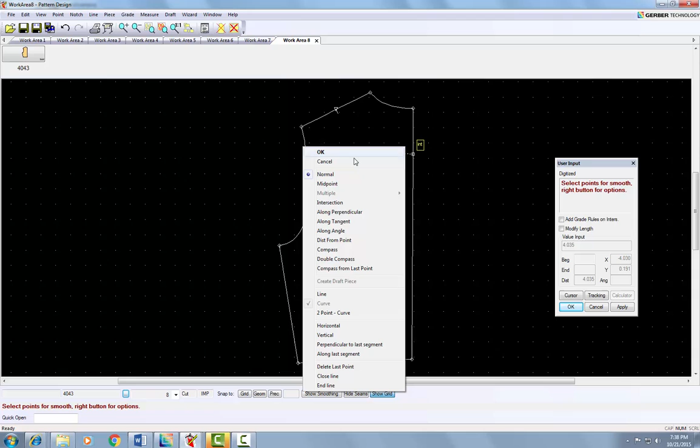First point, I'm going to click here, right click, change to value mode. Now you can see the yellow arrow occurred going down, so that will be 3 inches down. I'll type in 3 and OK, change that to cursor mode, and then go to the other end. To make sure I'm doing it straight, I'll right click and go into horizontal, reach the other end, click, and click OK. So it's perfectly on that yoke.

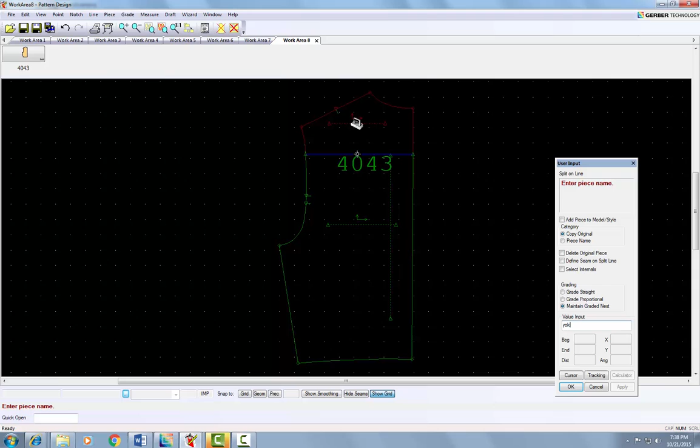Now I'm going to separate these two pieces using Split Piece on Line, splitting the piece on the line we just created. We're going to call this yoke 1, and bodice 1 for the second piece, the bottom. If you see this weight, the paper weight for your pattern, that means we're on this, the red one, to save.

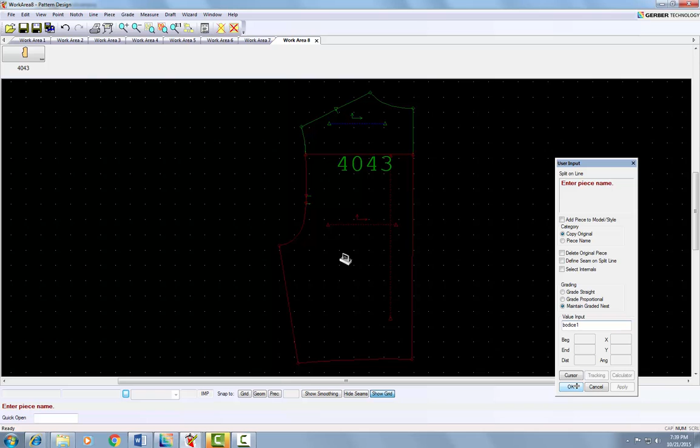So now I'm going to separate these 3 pieces. So I have these 3 pieces. I'm going to click OK, so I'm out of that menu.

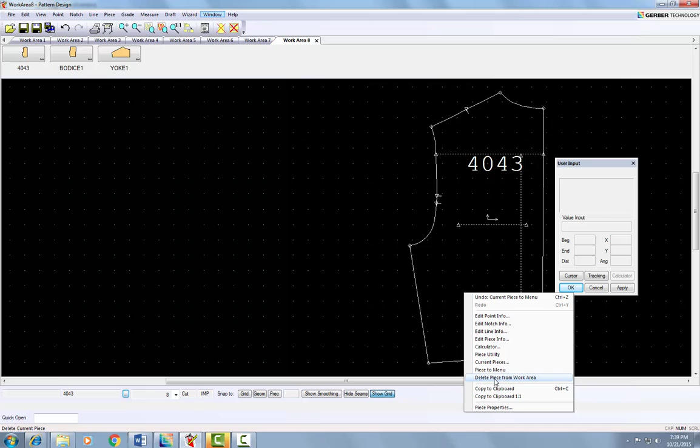Right click, send this piece to the piece menu. Right click, delete this piece from the work area because I don't need it anymore. And I want to be able to see that you have saved the bodice and the yoke.

So now what we're going to do is a variable fullness. We're going to take down the bodice. We have to add 2 inches on this portion of the yoke, and then add 4 inches at the bottom hem. So we're going into Piece, Fullness, Variable Fullness, and we are going to go up and down to slash it.

First we create a slash from here, up, right click, vertical, all the way down, and click at the bottom hem. Do another one, slash right here, right click, vertical, all the way down, slash to the bottom hem, and I'm going to click OK.

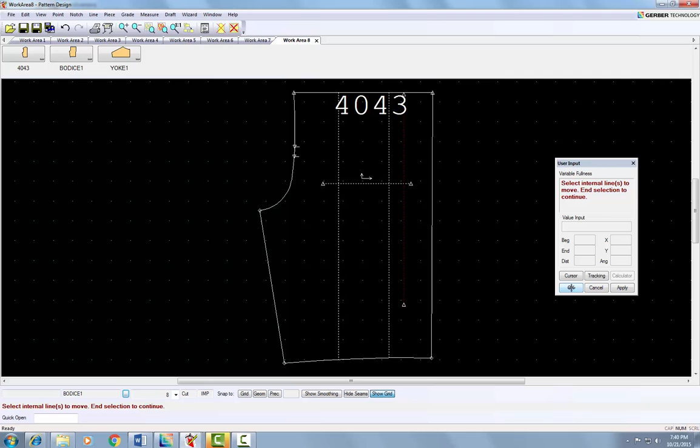So the location to remain stationary, we'll click the center back seam. Internal line, I'm going to click, any box will pick up the internal line. It says OK, so now we have to position the piece to create.

If I'm in cursor mode, this thing will just go like this as I wish, so I'm going to change to value mode. Once I change to value mode, the yellow arrow occurs again. If I go this direction it will be plus, that direction minus. Since I have more fabric here, I'm going to go that direction and enter the fullness there.

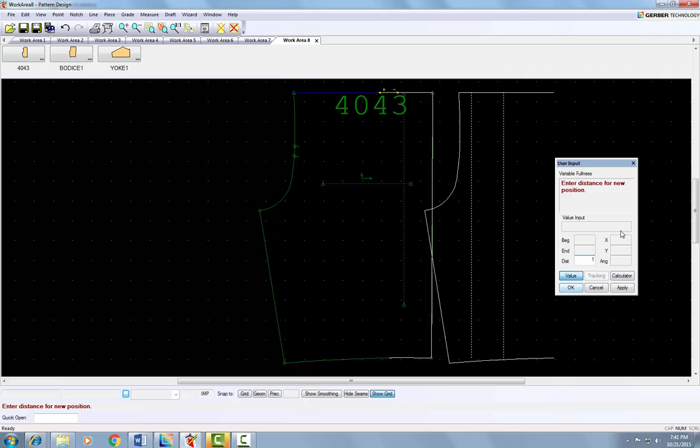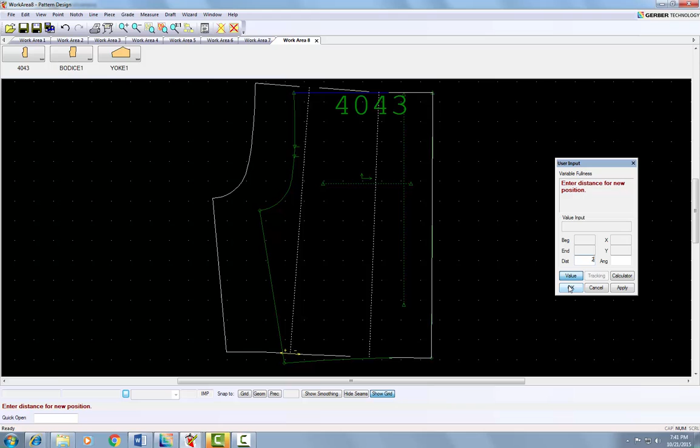So on top, we're going to enter 1 inch, plus, okay. Now automatically, because it's a variable fullness, it dragged down to your second portion, which is the bottom hem, and I'm going to add 2 inches down here, the distance 2 inches, pop back up. So we add another 1 inch on top, okay, and 2 inches at the bottom, okay. Then I'm going to click OK.

This is your piece that you just modified, adding the 2 inches fullness up here and adding the 4 inches fullness down here using the variable fullness menu.

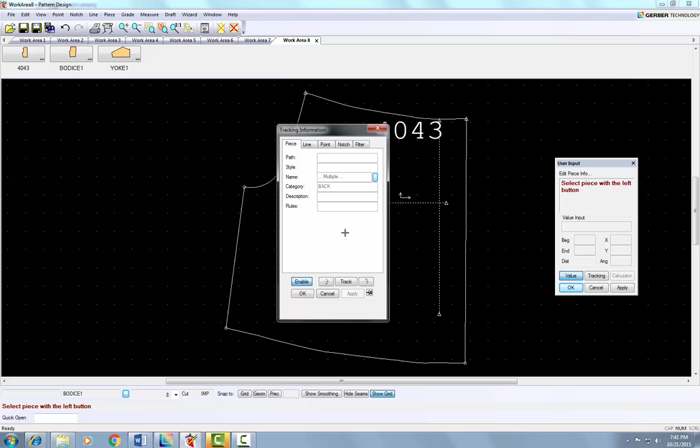And then you're going to right click here, edit piece info, and you're going to name this. We're going to name this tent. Okay, apply, OK.

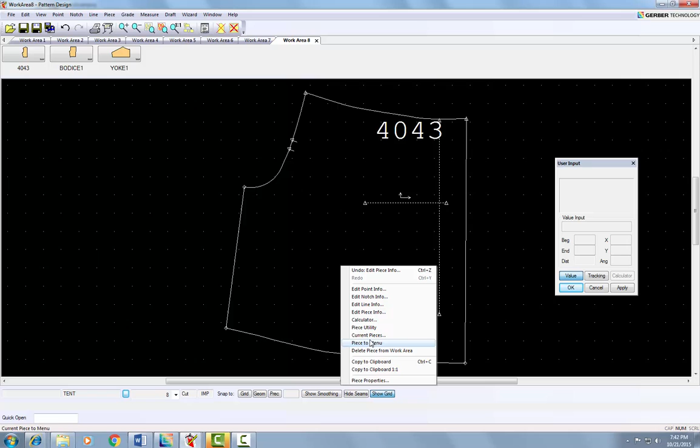So you have this piece in the piece menu, you have TENT up here. So this is what you work on. You separate the 2 pieces, and you want to see what you worked on, it will be right here. Separate all the pieces, you have all this thing you modified just now, and you take a screenshot, you could upload it to Blackboard.